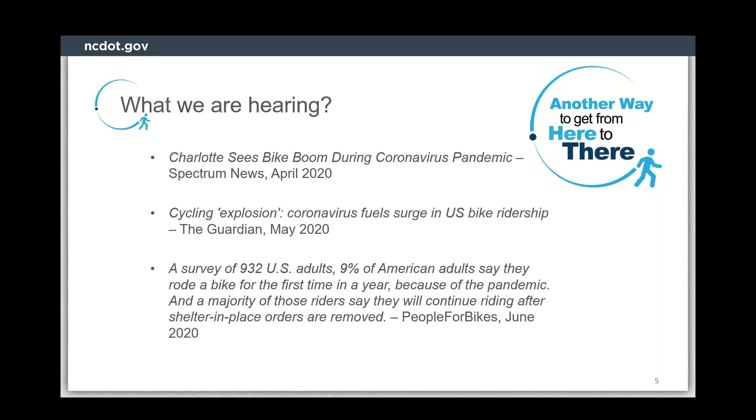Maybe their lifestyle will change a little bit. How will they be moving forward in their commute or their activities? So that's something that's going to be looked at too.

Charlotte and Raleigh and other places had incorporated these as well, but we're still seeing these things happen. This was just a couple of weeks ago, and that's moving forward with what they're seeing in their neighborhoods and what people are asking for. That's a lower cost way of doing things, of course.

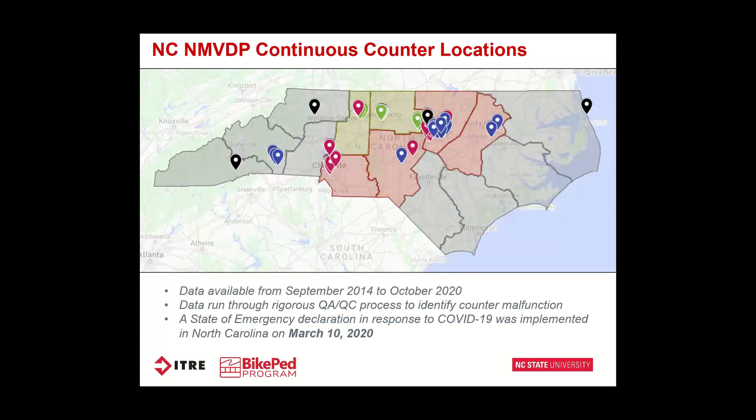Changes in daily volume distributions indicate that more people are taking recreational trips, but fewer people are taking errands or commuting trips.

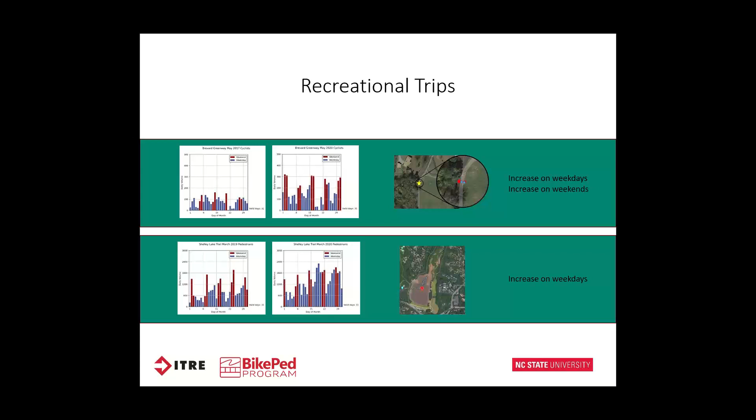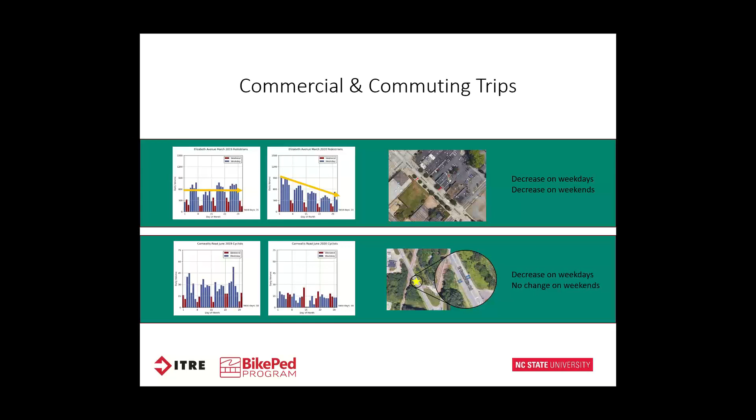We also investigated the average distribution of volume within each day. Changes in hourly volume patterns indicate route users are making trips for different reasons than before COVID-19.

Each of these 3 trends reinforces that travel to destinations that were closed due to COVID-19 decreased, while recreational use increased.

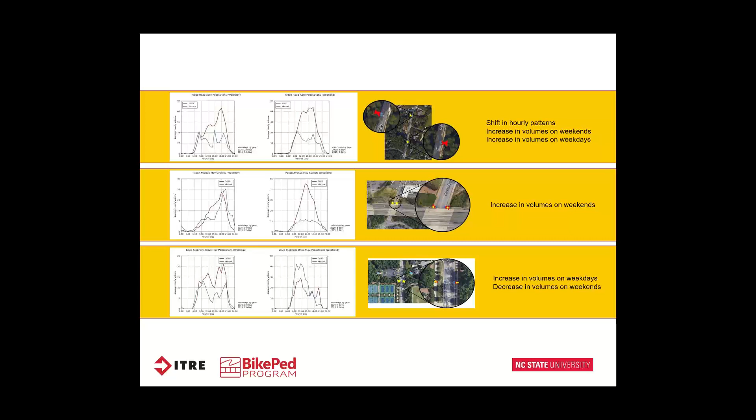One of the core questions we investigated was not only whether volumes had changed, but how much they were continuing to change over time. At many sites, the effects have decreased as individuals adjust to a new normal.

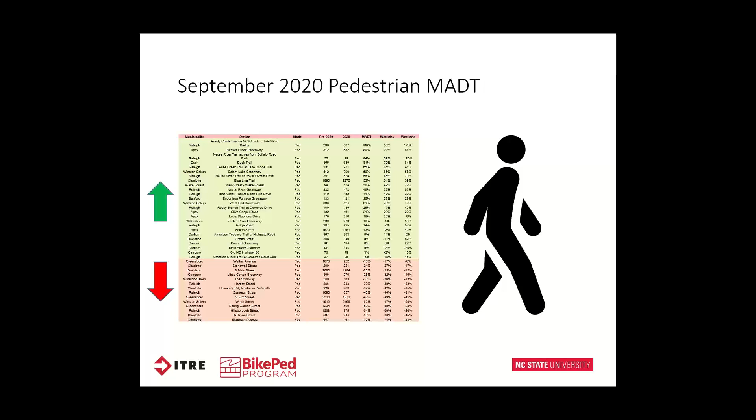Stations that represent recreational off-street shared use paths have consistently higher daily volumes in September versus previous years, indicating that recreational walks and runs will continue to be significantly higher than previous years on these facilities.

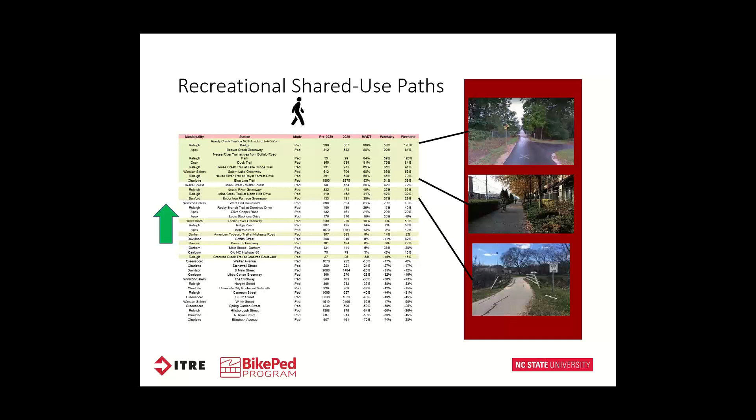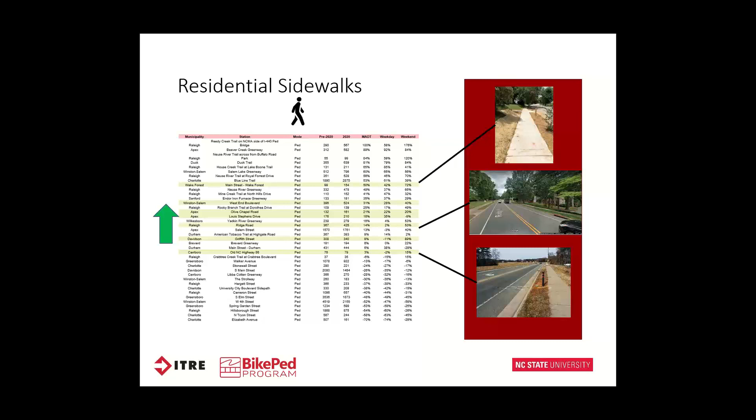Stations that represent downtown business districts continue to have lower volumes, indicating that people are traveling to shopping, work, and dining destinations less frequently. The one exception to this trend is Salem Street in downtown Apex.

Parking spaces were converted for temporary dining spaces to promote social distancing over the summer. The activity near this counter may represent the same wait staff or other restaurant patrons walking past the same sensor, which may not mean there's necessarily more people visiting Salem Street, but it does show that activity is higher on this street than other streets that did not impose similar policies.

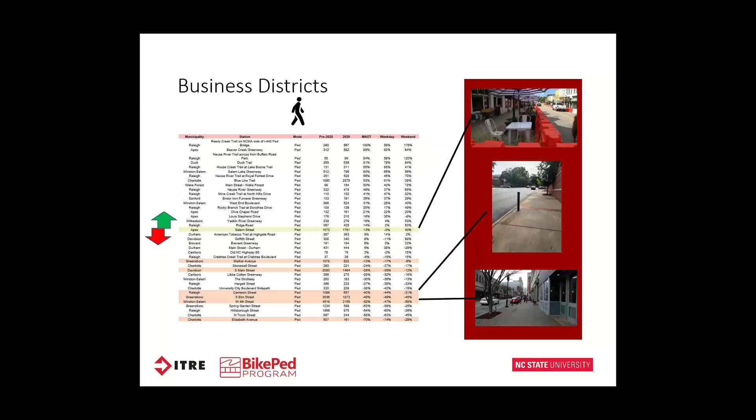University commuting corridor volumes have decreased since most students are either at home or studying remotely. It should be noted that Duke University students are still on campus as of fall 2020, and we can see that the average daily traffic at the Durham Main Street counting location has remained relatively unchanged.

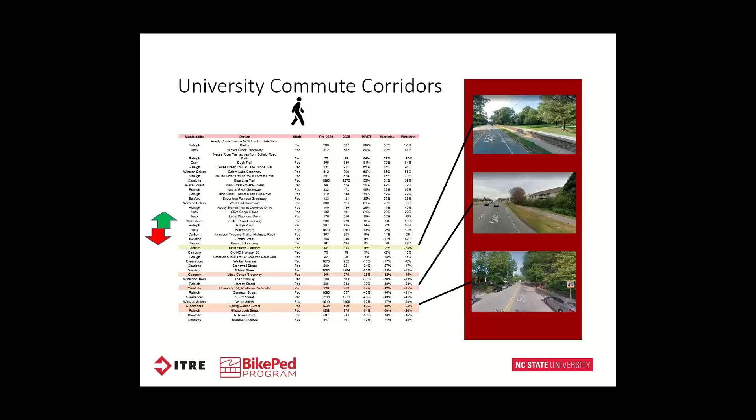And finally, pedestrian volumes on facilities that are gateways to downtown areas have decreased significantly, which shows that these types of facilities have not experienced the same increase in demand for recreational trips as those closer to people's homes.

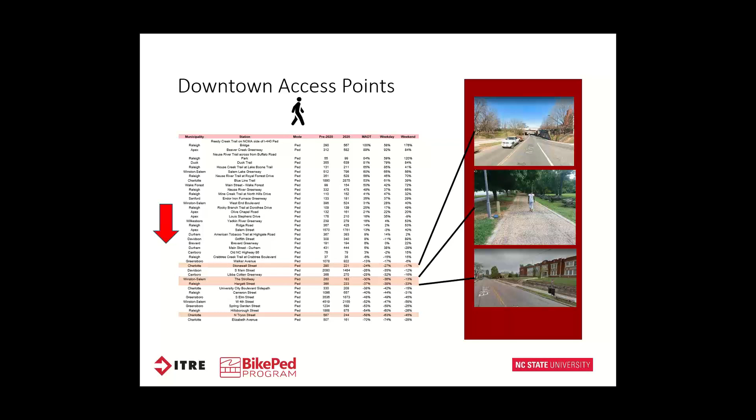For bicyclists, there are similar patterns. This chart shows all counting locations where bicycle sensors were functional for the month of September 2020. The magnitude of percent increases and decreases is actually much greater than for pedestrian traffic. You can see that on one facility, there's been a 200% increase in daily bicycle traffic, whereas on the lower range for a university corridor, that decrease was down by 78%.

So like pedestrian activity, bicycle activity has increased on almost all shared use paths that are monitored in the program. This highlights the increased demand for safe recreational bicycling during periods of social distancing and remote work.

Residential and suburban roadways used more for recreational reasons have seen an increase in bicycle activity, whereas bicycle activity on residential and suburban roadways used for commuting decreased. West End Boulevard in Winston-Salem is next to a large public park, and New Hope Church is near a popular shared use path access point. So those are the two areas that have increased in our sensor network.

While Selwyn Avenue, which is a main bicycle corridor that connects Charlotte City Center to residential areas, people are still using it for recreational trips, since you can see that the weekend volumes have increased in recent years. You can see that there.

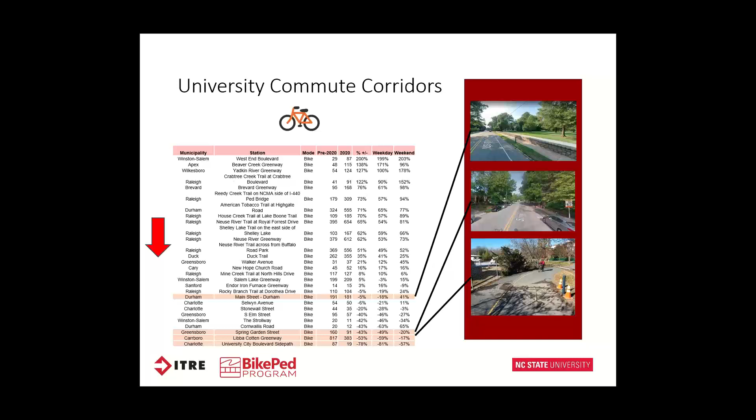So while this data shows us that demand has increased on recreational paths and that temporal volumes have changed, there are some things it can't show us. We don't actually know who these people are who are using these facilities. We don't know the demographics, like race or income bracket, or even if these are new users or people who were using these facilities more and now have more time to use them more often.

We don't know whether these trends will continue, and that will be very dependent on the future of remote work and how much time people are spending at home. But we do have a feeling that these increases and trends will continue for the near future.

These trends are also going to be impacted by how communities are currently investing in active transportation facilities right now. You can see that there is an increased demand for very safe off-street facilities, so the availability of these off-street facilities could determine how these trends continue in the future.

Also, for our program, since we're a non-motorized traffic monitoring program, these changes in temporal patterns will affect non-motorized traffic monitoring practices. Many of these continuous count stations were set up to define factor groups, which define temporal patterns, but you can see that those temporal patterns have changed significantly.

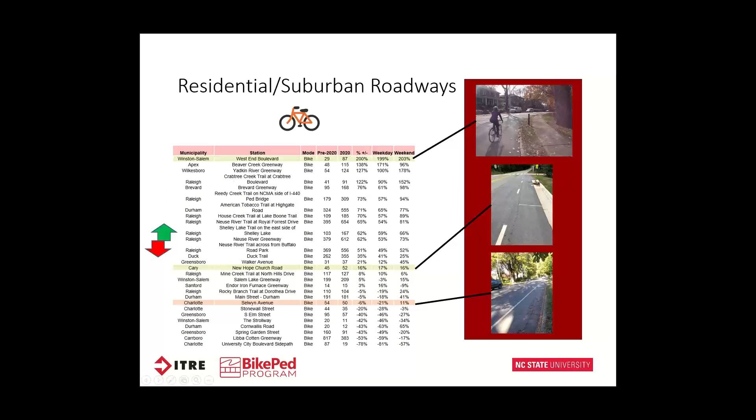And you can see here, on the Carrboro Libba Cotten Greenway, pre-2020 the average daily traffic on that corridor was over 800 people in September, and this year the average daily traffic is down to about 400, which is still a lot of people using that facility. It's just significantly less than previous years.

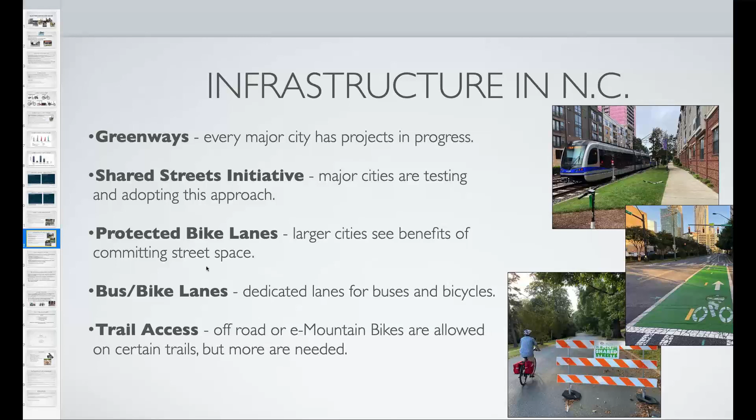In terms of Department of Transportation, and a little bit of information on how things have been going and how things could be improved—there has been a statewide pedestrian and bicycle plan that was passed in 2013. The goals were to improve mobility, safety, health, economy, and environment. For the most part, it's been left unfunded at the state level. There's been restrictions to utilizing federal money, which can be limited for these projects, and it really goes back to the local municipalities to fund this at an unequal rate, so there's some inconsistencies across the board.

NCDOT funded projects have been vastly limited since that date. I did include a link here to a map that's been produced to show projects that have been completed and some gaps in that as well. So there's an overall interconnectedness of all these facilities that seems to be an opportunity ongoing to improve bicycling in North Carolina in general.

In terms of developing infrastructure, again, it's been left to more local organization to plan, design, and build in the absence of some of the state level funding. Improvements currently seem to be more incremental, inconsistent, and not as substantial as a lot of people in the cycling segment really would like to see. I think there's benefits to all cities, and certainly major ones too, focusing on this.